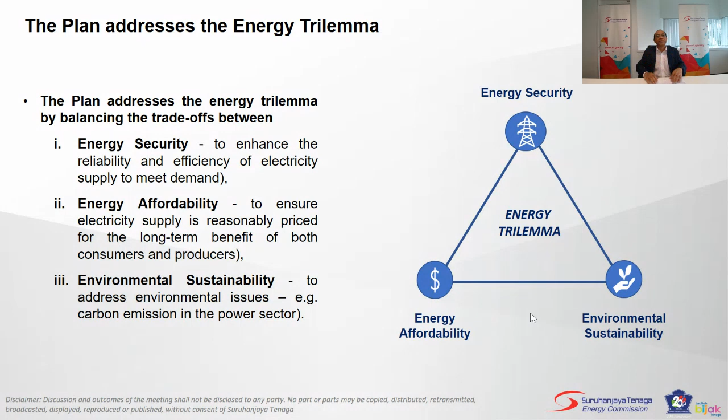Next slide please. We were rated by the World Energy Council recently, as recent as 2020. Malaysia ranked overall number 33 out of 108 nations in terms of the World Energy Trilemma. You can download this report as well. In the Asia region, we are number 5, after New Zealand, Japan, Australia, and Korea. Not too bad, our position. Out of 108 countries, we are number 33. We are quite high ranking among Asia countries.

If you compare back before 2020, in 2019 we were ranked number 51. So we have improved, right? That's on the Trilemma ranking.

But this is again, we were also ranked by the World Bank in their doing business ranking. In terms of one of the criteria that World Bank annually assesses, what they call getting electricity, we are ranked high, number 4, after UAE, Korea, and Hong Kong. There are various parameters they use, such as time, procedures, reliability of supply, and transparency of tariff. Do consumers actually get charged transparently on the tariff? How transparent is that particular country? In terms of reliability, in terms of interruption index, SAIDI, and so on and so forth. So we are ranked number 4. Quite good, I would say.

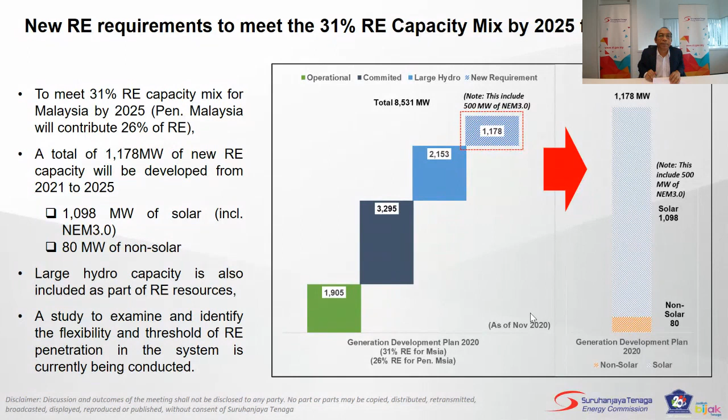So I anticipate there will be findings in the studies that we will adapt or adopt and implement, especially regarding what you have heard about, the duck curve in California and the issue of variability of renewable energy, especially solar and wind, that we have to manage. We have to make sure it will not have a severe impact on the reliability of the network.

That's one note I cannot skip, but had to mention in this presentation. Beyond 2025, moving forward, you may ask what will happen. We are progressively moving toward achieving less CO2 emission. As far as this 2020 development plan, we are moving toward 40% RE capacity by 2035 - by 2035, the whole of Malaysia will have 40% capacity.

For Peninsula in particular, we have 31% renewable energy capacity, so we have more RE mix in the power or electricity mix - 2,414 megawatt by 2035, on top of the 1,100 megawatt by 2025 I mentioned just now. So again, we have to make sure the grid is ready with all this VRE into the system, and of course you're all aware of possible solutions, especially battery storage and so on.

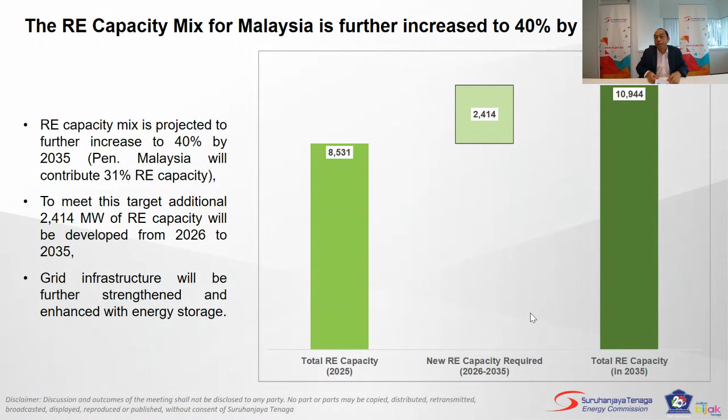So if I can break down the mix of capacity at the moment, we have a certain percentage of gas, coal, and renewable energy.

Moving forward, you can see the bar chart in green - we are increasing renewable energy as we move forward. The first phase is 2025, and the next phase is 2039. As the renewable energy mix increases, we have to bring down the coal capacity mix in the system, while gas also will take over, since coal emits double the CO2 compared to gas for the same unit of energy or kilowatt hour each technology produces.

So beyond 2030, there will be about 10,000 megawatt of new thermal and renewable energy capacity required - you can break it down into 1,000 renewable energy and thermal 9,000. So having thermal generation capacity is crucial in maintaining generation reliability and adequacy in the system.

Of course, when we do planning, we have a few criteria that we have to comply with. One is the HHI index, diversity index, concentration index that we have to comply with.

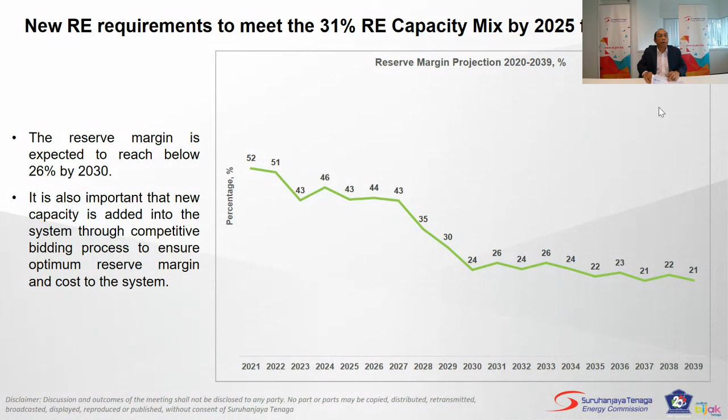And why do we need reserve margin? Because despite the capacity in excess of maximum demand that we have, a plant can go wrong - it can be on forced outage, it can go wrong without plan. We also have to allow some plants to go on outage for maintenance, on a maintenance schedule. So those are the reserve margin allocated for those outage schedules.

Next slide please. Renewable energy capacity in Peninsular Malaysia is expected to increase to 31% by 2039. The share of renewable energy capacity is projected to increase - I already mentioned from 17% today, this year, to 31% by 2039.

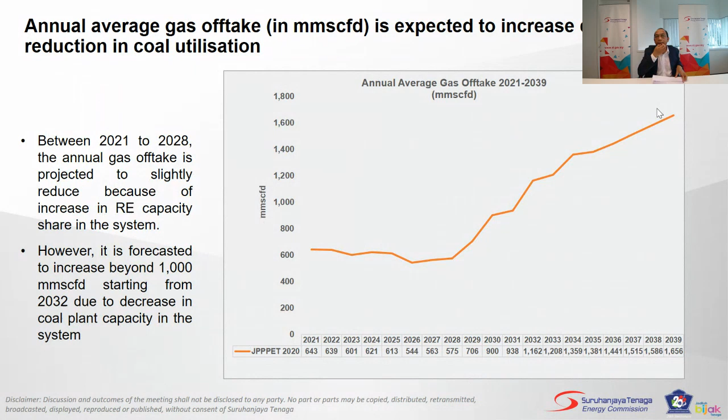So that's the projection for the natural gas demand under this power development plan. Next target - this is very important. What is the driver? What's our aim? It's one of the trilemma targets: to meet 45% reduction of carbon intensity over GDP.

So those are the plans I mentioned: increasing renewable energy capacity, being less dependent on coal plants, and all the programs we have - large solar plants, net energy metering, feed-in tariff program, self-consumption program. We have technology beyond solar too - biomass, biogas, hydro, mini hydro, medium-sized hydro, and large hydro.

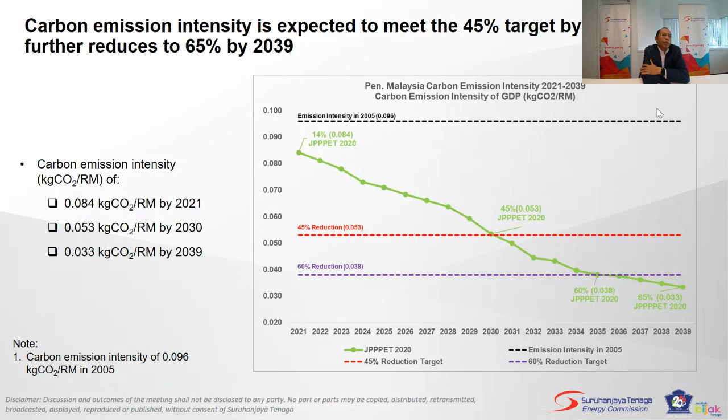So that enables us to meet it. By 2030, at least in the power sector, in the electricity sector, we will meet the 45% reduction by 2030 from the base of 2005. So those are the numbers of CO2 emission we plan to reduce over GDP, the carbon emission intensity. These are the main drivers for how we came up with this plan going forward to 2025 and 2039.

So in summary, we have to consider the trilemma, balancing security, affordability, as well as environmental sustainability. We had this pandemic last year, continuing this year, and we've had reductions in demand due to economic impact on economic activities. These are the challenges we have to face.

But again, we can forecast the V-shaped economic recovery, and we have to get ready for this demand uptake - a sharp swing back on the maximum or peak demand from industry, commercial sector, and consumers. By 2030, about 6,000 megawatts of new generation capacity is required to meet demand growth and replace retiring plants. This power purchase agreement will retire, so we have to make sure we have enough capacity to meet growing demand. It's also important that this new capacity is added through open competitive bidding to achieve optimum cost and affordable tariffs for consumers.

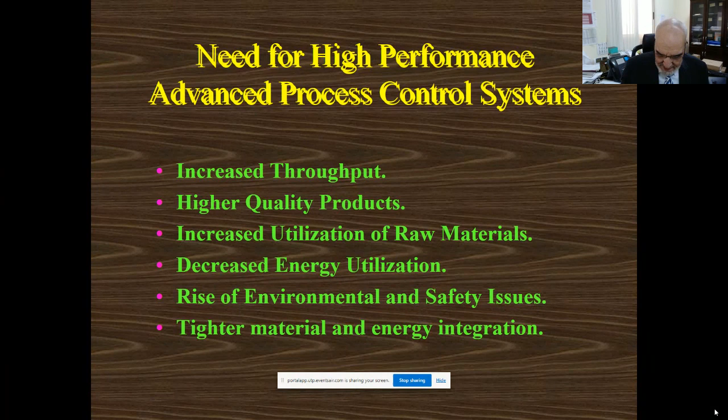Here are the challenges that motivated me a few decades ago to start working in this important area of what we call model-free control. Model-free control means you design a control system without knowing the detailed dynamic model of the physical system, because in some situations it is very difficult to know the detailed model, as I'll give you two examples in a few minutes.

What prevents you from knowing exactly a model are many of these things I am listing, these challenges, in this slide.

Many physical systems, such as thermal systems, have delays in the process. Communication networks have delays in the message, in the data. Sometimes this delay is unknown or random or uncertain, so you don't know it, and hence you will not be able to model it.

What complicates things more, some physical systems are non-minimum phase, a phenomenon meaning the system has zeros in the right half plane, and therefore it's much more difficult to control. Sometimes you don't know beforehand that your physical system is non-minimum phase.

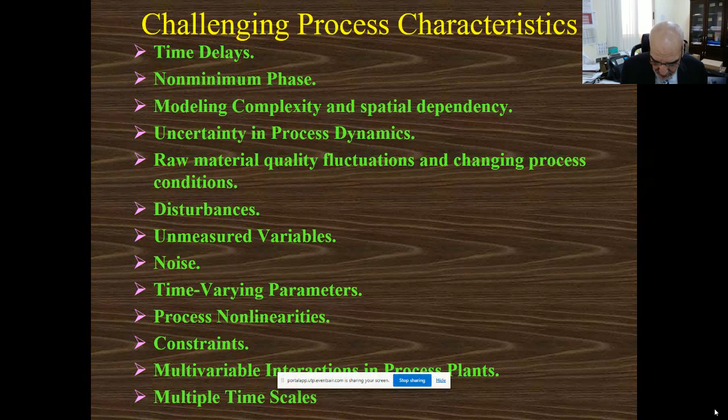Therefore, you have to design a controller that can react as slow as 40 minutes to correct for dynamics, and as fast as milli or microseconds to compensate for electrochemical dynamic behavior. So this is not trivial at all.

Let me give you two examples - of course there are hundreds - why these challenging problems of noise, uncertainty, interference, etc. are intrinsic within the problem, and therefore you have to find a control design that does not assume exact knowledge of the dynamic behavior of your open loop system or plant. You have to design a robust controller without knowing the model, without a physical, physico-chemical, or mathematical representation of the differential equations governing that system.

Here is a typical case. You have a plant, call it a refinery, call it a transformer station, connected to actuators and sensors, controlled by many controllers, but the controllers are 1,000 kilometers away from the plant. This is happening today; it exists in many places. You need to control a process somewhere, a plant, by a controller elsewhere, through a communication channel, through the internet for example. You can imagine how many challenges you have.

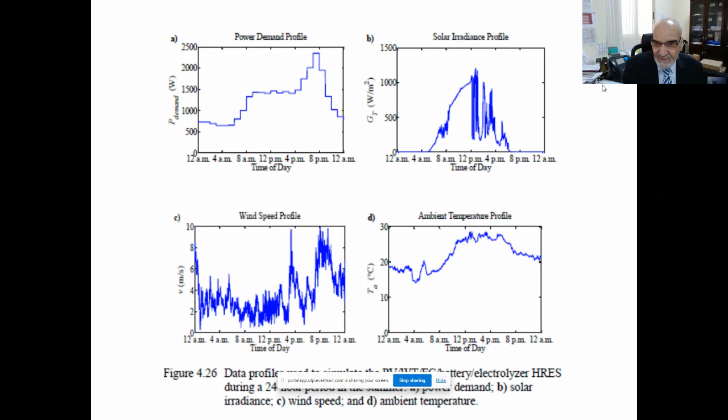So you can see that there are many uncertain, unknown interferences and disturbances, and therefore you will not be able to have a good dynamic model of your renewable energy resources to develop a controller that meets its objectives.

Of course, for all these challenges I mentioned, over the last 40, 50 years people developed many solutions, algorithms, and techniques. There are multivariable control techniques such as decoupling control, LQR (linear quadratic regulator), LQG (linear quadratic Gaussian), H-infinity robust control, and all kinds - decentralized control, optimal control, adaptive control, model predictive control, now implemented everywhere in industry, robust control, nonlinear control, fuzzy logic control, neural networks, expert systems, genetic algorithms, hybrid, fractional, chaotic.

All of these are important techniques that have been developed, and they work in some situations. For some of them, the model does not need to be completely known. For others, you need reasonable bounds about the model, etc.

We don't have time to go through all of this, but we would like to introduce a new technique, developed recently - over the last 20 to 30 years - introduced by Professor Han, J. Han, from China in the 90s. Well, he did it in Chinese in the 80s, but it was published in English in the 90s. It's called ADRC, Active Disturbance Rejection Control. And what he said is the following: I don't have a model, I don't have a mathematical model for my plant, for all the reasons I mentioned.

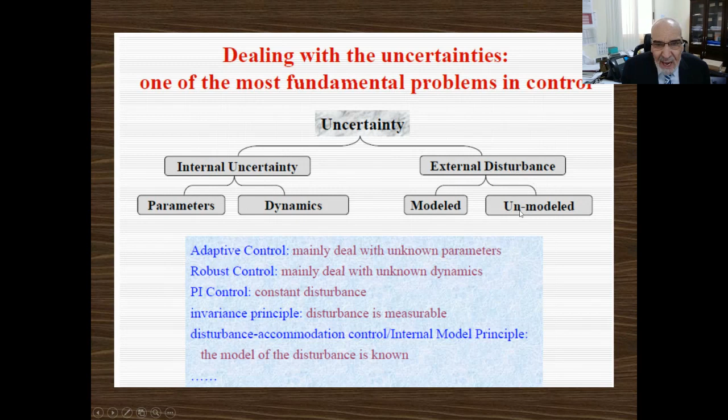So partially for some of these types of disturbances, many techniques have been successful. Adaptive control is implemented in the industry for processes having unknown parameters, robust control with less degree for unknown dynamics, etc. However, you need a new control scheme to compensate for all these types of uncertainties, and that's what ADRC can do, and that's what Professor Han and his people after him, Gao and many others, proved, and nowadays it's being implemented in so many

industries, many applications, and many industries adopted it as a solution to modern plants. So basically, Professor Han said, all right, I have a total uncertainty, which is all the uncertainties, internal parameter, plant uncertainty, external uncertainties, and I want to control the system with these uncertainties, which may be all kind, linear, nonlinear, time varying, or in time invariant, parameters, or all kind of uncertainties you could imagine.

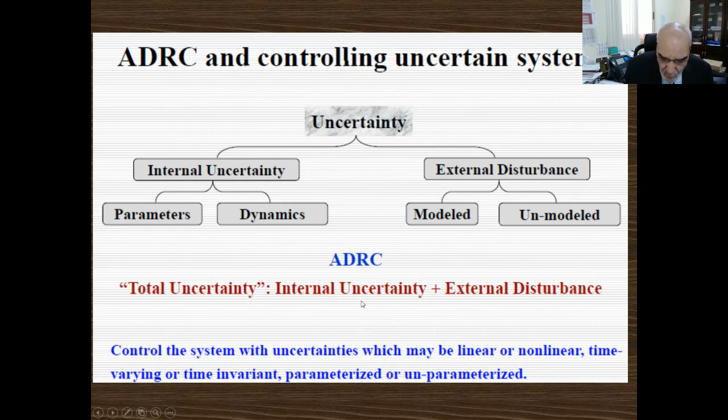So here is the problem. You have a process. The process may have some internal uncertainties, external uncertainties, and of course, all the disturbances. So he said he's going to do two operations. What are these two operations? Using input and output data, input sensor, output sensor.

So using input and output data, he developed an estimator called ESO, Extended State Observer. And with this estimator, he will estimate the disturbances. All these disturbances, he will estimate them from just input-output data of the process.

And then once he estimates the disturbance, of course, he can correct for it. He can correct for it through a controller to meet the objective so that the output tracks the reference and meet closed loop performance, as well as reject all those disturbances. Very innovative idea developed in the 80s, 90s that is now gaining ground daily.

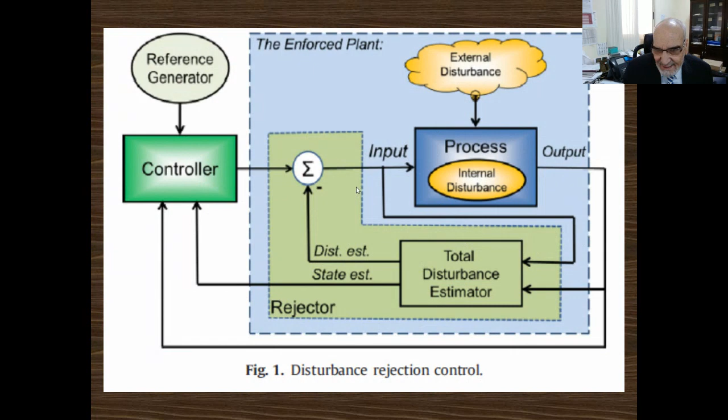So here it is, basically, the idea is to obtain a proper estimation, ESO, Extended State Observer, and I'll show you in the next slide why it's called this way. And I'll show you why it's a second order system, external disturbance. You estimate the disturbance, and then you develop a control input

so that you compensate with this inner loop. With this inner loop, you compensate for the disturbance. What you get here is already compensated for the disturbance. And then once you compensate for the disturbance, you have another loop, outer loop, so that you stabilize the overall system and you let your output track, for example, the reference signal. So meet your objectives.

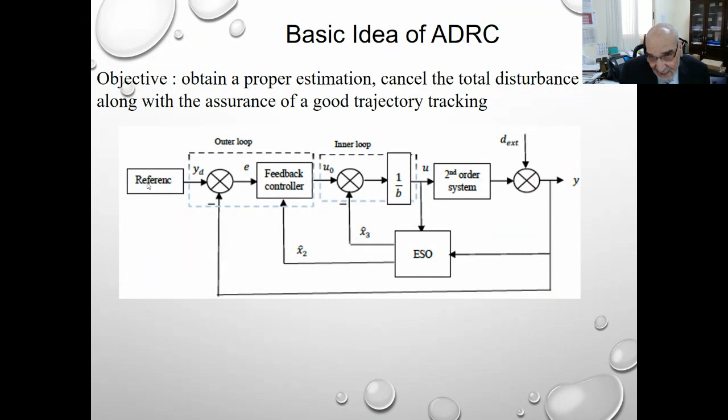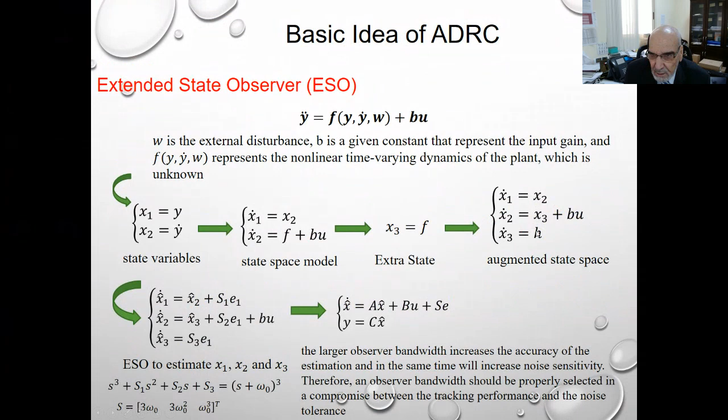So wrapping up the whole thing, here it is. You use the input online, you are doing this real time online. Your physical system is running. Through sensor, you got output data. Through sensor, you got input data. Using input and output data and the ESO model we just saw, the third order model, with the third order observer.

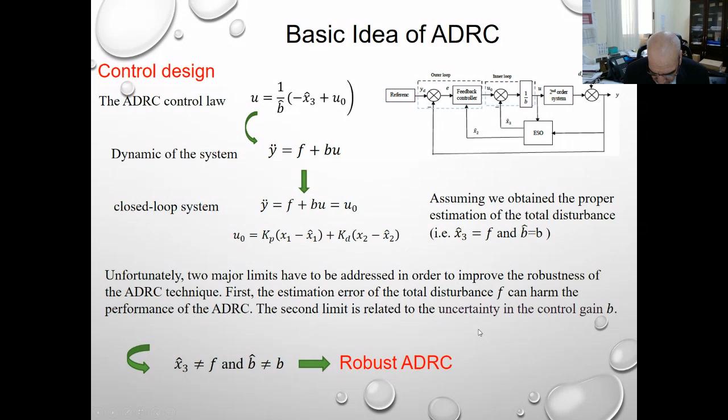All right, so, oops, what happened? It doesn't go anymore. Okay, oops, I cannot go anymore. Ooh, all right, ah yeah. All right, so here it is.

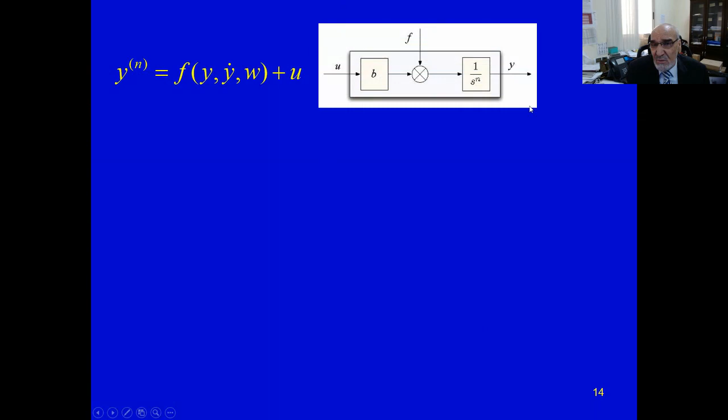So recapitulating, as I told you before, this is valid for nth order. This could be the nth derivative. And once you correct, this is what you get. Once you correct for that U0, you get an nth integrator.

And then all you need to do is, here it is, with the extended state, you are going—this is how you reject, as we said. And then here is...

So this one is the assumption you have on your original system. This is just this equation. You estimate the state and reject, compensate for the thing. All of this inner loop becomes what? Nth integrator. So now it's easy to control this. There are no parameters to eliminate. You just have to stabilize this with a PD.

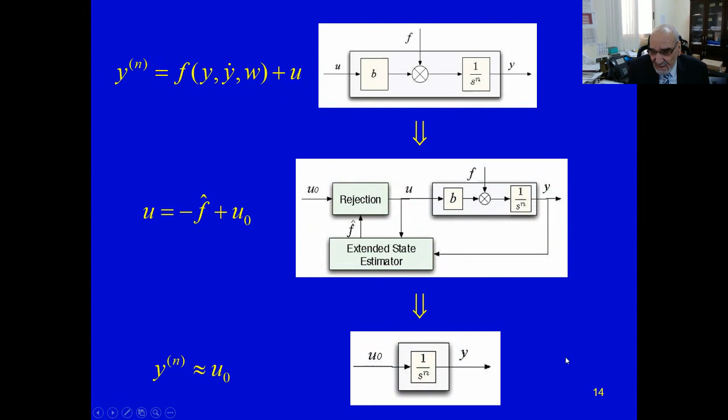All right, now this was about ADRC. Now, what I did in my work, and my group, is—many results were already existing in ADRC over the last several years, so we wanted to do something new. So we developed what we call fractional ADRC. Let me go quickly.

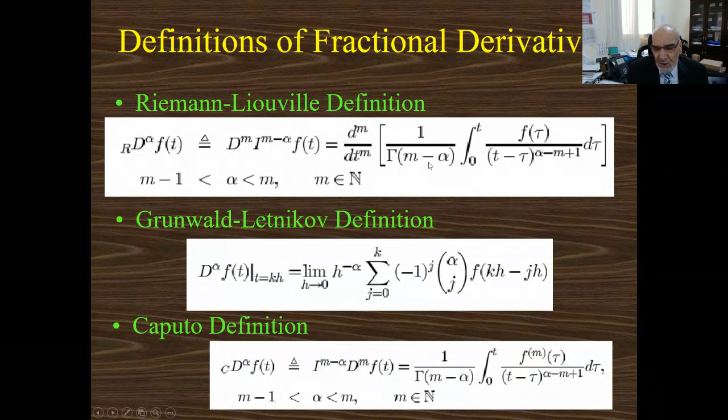What is a fractional operator? It's the generalization of first derivative, second derivative, third derivative, first integral, second integral. So instead of saying alpha equal 1, first derivative, I say alpha equal 1/2, half derivative. Alpha equals square root of 2, square root of 2 derivative. Alpha can even be a complex number. They call it fractional derivative. There are 3 types of fractional derivatives, but as long as you are consistent, you can use any one of them.

What does it mean to have fractional system or fractional dynamics? I have to go fast because I'm running out of time. In time domain, you are going from the normal exponential behavior of differential equations, the eigenfunctions, to hyperbolic behavior. It's much more general. And in frequency domain, you are going from that minus 20 dB per decade slope of a pole, or plus 20 dB of a zero, to a fraction of that.

So you can have 10 dB, 5 dB, etc. And in terms of memory, you are going from short memory—differential equations have such short memory. For example, a second order RLC circuit will have a memory of 2 units. But fractional systems have long memory. Of course, differential equations are similar.

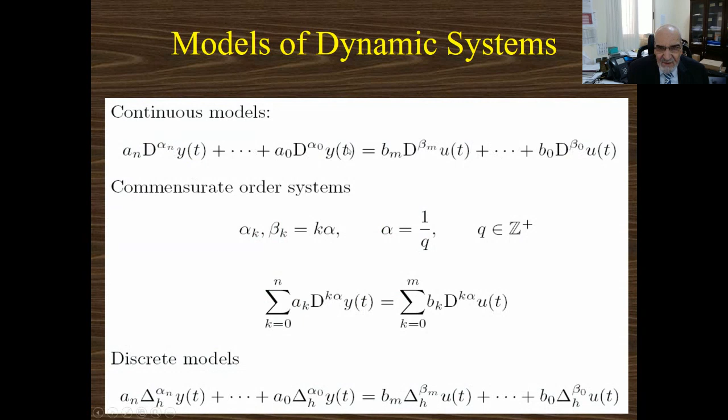Instead of having integer derivatives, you have fractional derivatives. Alpha and beta can be any real or complex numbers. But what's important now, if you have a plant and if you have a fractional integral and fractional derivative, you see—if mu equal 1, this is first derivative; if lambda equal 1, this is first integral, and this will be a PID controller. But now it's a PI lambda D mu controller.

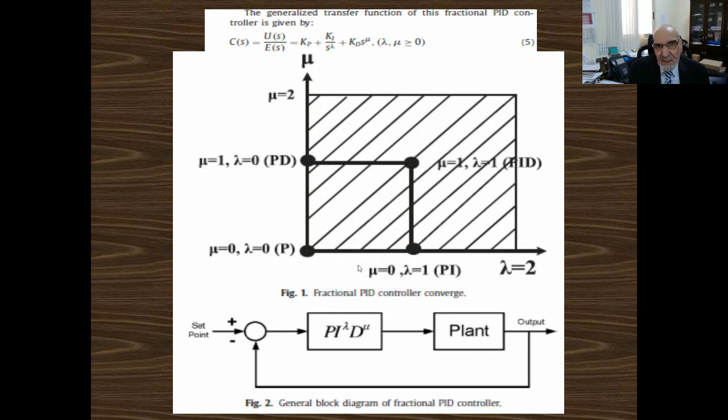If you design also lambda and mu, then now you have 5 degrees of freedom: Kp, Ki, Kd, that's 3, lambda, mu, 5 degrees of freedom. Instead of choosing just a P, PI, or PD point, you can choose with mu and lambda anywhere between 0 and 2, and you have infinitely many designs of the famous PI lambda D mu. Therefore you can meet 5 performance objectives, and you will do much better than the classical integer PID.

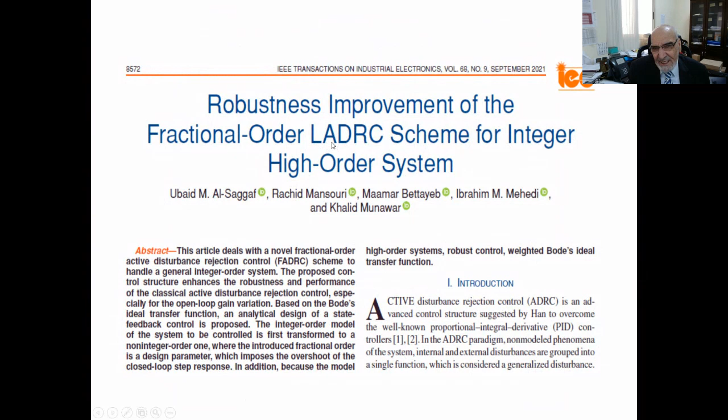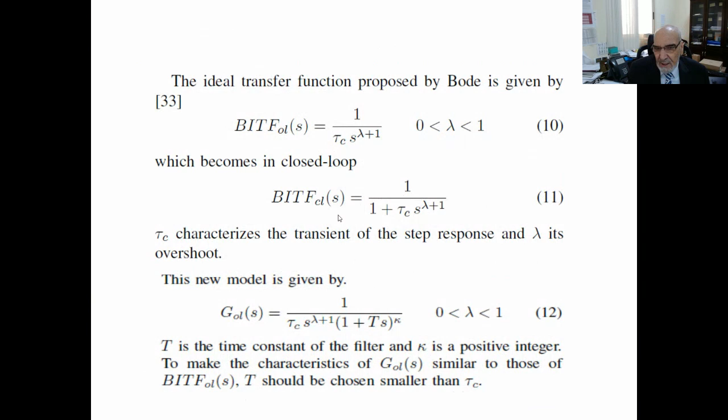I'm going to close with a few examples of things I did with my group. With fractional order, we improved the linear ADRC, and we proved it by simulation and experimentation. The way we did it is by imposing the closed loop transfer function to have the Bode open loop characteristic, which is well known, so that it will have some robustness performance.

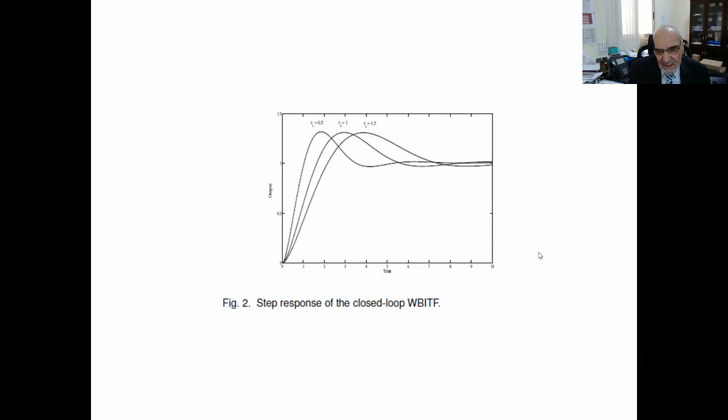This is a property of the closed loop Bode transfer function: you change the parameters of the open loop system and the overshoot is kept constant. It's called the iso damping property. It keeps flat phase margin and constant overshoot regardless of gain parameter variations. So here is the trick we do.

If you had an nth order system with ADRC, we add and subtract, because we want to develop a fractional controller with 5 degrees of freedom. So we want to create a fractional state space. This is not fractional, this is integer. So we add and subtract a fractional term, lambda is fractional. Then we put these two on the other side, and they become part of the disturbance. Look at this, I have a new disturbance: before I had F1, now it's a new F, which is the original F1 plus all of this I added.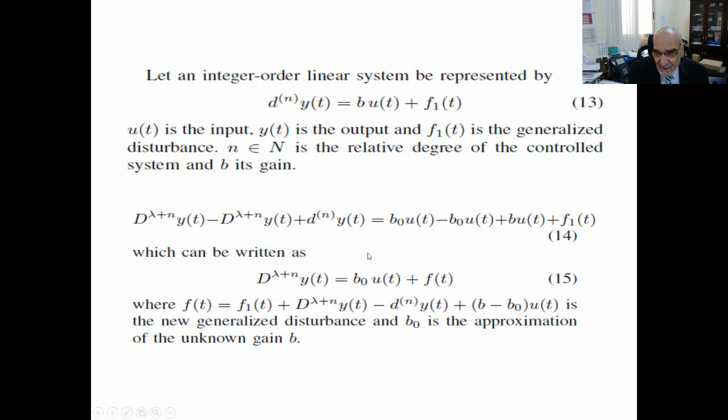Now what do I end up with? Look at this, this is a fractional state space, a fractional dynamic equation because lambda is fractional. So then I can develop a fractional estimator, fractional ESO, and fractional estimate, and then do the same trick of compensating for the disturbance and apply a simple proportional or state feedback controller, so that Y will track R.

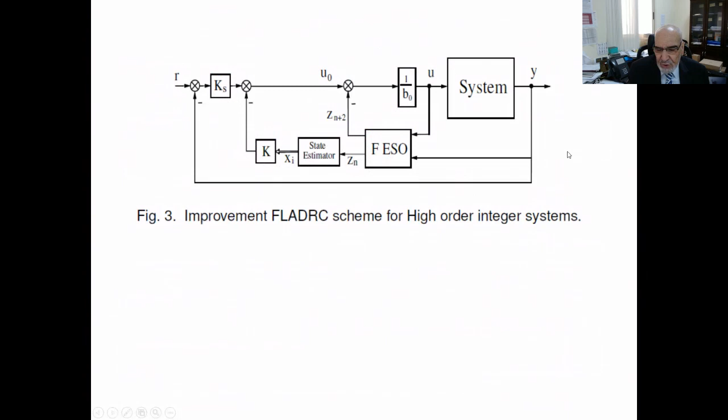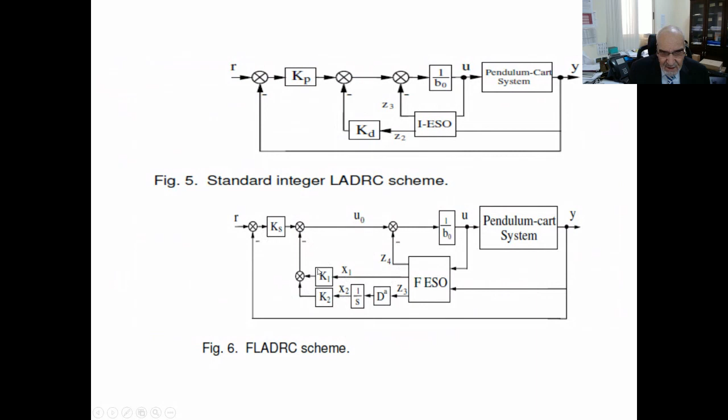I stabilize the system, I meet a certain overshoot, etc. And magically, we applied it by simulation and experimentation to an inverted pendulum, and it gave excellent results. So we developed the fractional extended state observer. We developed the estimate of the state that will be fed into the state feedback, and we were able to get excellent performance.

What is it? Desired is the blue. Here is the true overshoot. But the minute you have perturbance or parameter variation, look, the overshoot you want - so this is not robust. But look, when we developed 1, 2, and 3, the hard lines are the fractional. Look at this, same overshoot - same overshoot for the red, the blue, and black. Same overshoot, iso damping property via fractional.

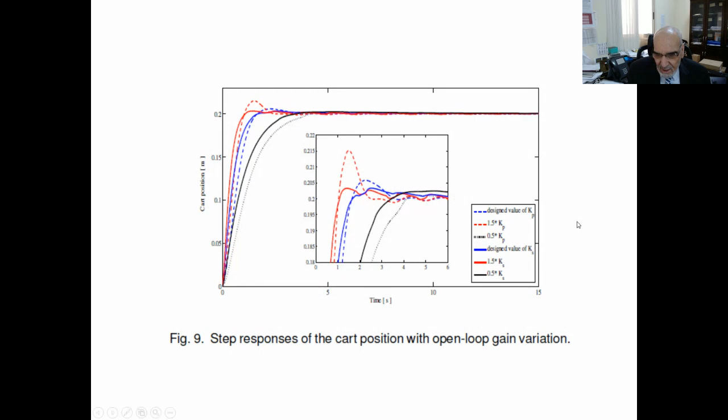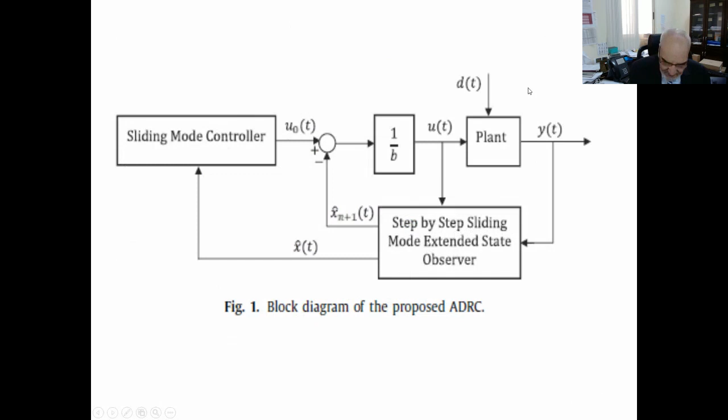Another example, I'll have to go fast because I think my time is almost over. All of these are from 2021. So here we introduce, with active disturbance rejection, a sliding mode. In the observer, we introduced, instead of the Luenberger observer, a step-by-step sliding mode observer, and also a sliding mode controller instead of the PD, and it gave excellent results. I will skip the results, but it gave much improved results.

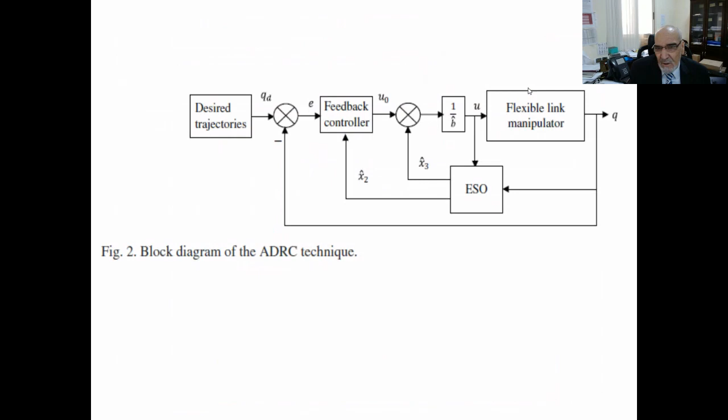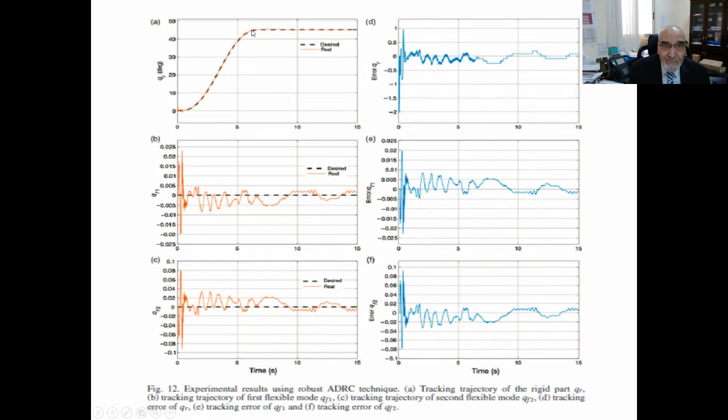And our last example, we applied the same ADRC with some modification to have some innovation on a robot, a flexible link manipulator, and we got also some very good results. Look at this, we are tracking perfectly the step response. Perfectly - this is experimental - tracking trajectory of the rigid part. We are perfectly tracking the system, the robot arm.

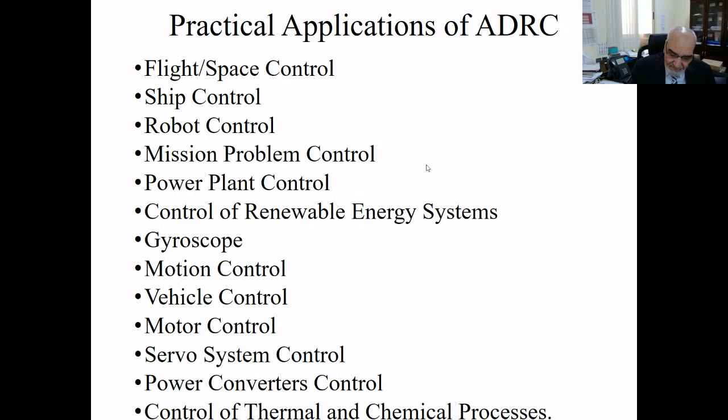All right, let me finalize with the next 2 or 3 slides. So this is to tell you that ADRC has been applied to so many applications, an infinite number of applications, and there is still, for those of you who I convinced today, you can really enter any area and make contributions, and I will be very happy to help you start if needed. Also many new directions in ADRC - the general stability problem for nonlinear systems is still open.

There are some partial results. ADRC tuning for nonlinear systems is a challenge. Selection of this N, the relative degree 2, 3, 4, is open. Tuning for B is still open. There are some preliminary results.

ADRC for systems, of course, if you have some partial information, you should use it. How do you incorporate it in ADRC? You need to develop a controller that is fault tolerant. You need to generalize to switching hybrid systems that work continuous and discrete at the same time, such as systems connecting to the internet and others.

Two degrees of freedom ADRC, fractional ADRC, ADRC for network control systems, generalization to infinite dimensional systems, partial differential equations, discrete time generalizations, and many more applications. All of these are possible applications where there is room for discovery.

Of course, there are many other directions of control in the future. We are talking about integration of control, computing, communication, and networks, fault-tolerant and reliable systems. We need to design high-level control for decision-making, wireless sensors, network control systems, Internet of Things control, cloud control systems, dependable control systems, digital twin control systems, and all the above. All of these are the control systems of the next 50 years or so.

Thank you, Professor Bettayeb, for that very interesting talk. I think this can be seen by the number of questions we are receiving from the audience. I suppose because your topic relates a lot to what many of our students are doing, since they come from different areas, and what you have presented seems applicable to all kinds of areas. I'll start off with the question, because this seems a bit like a mini reunion between you and one of our lecturers. I'll start off with Dr. Syed Saad. I am an old man, so I have many ex-students.